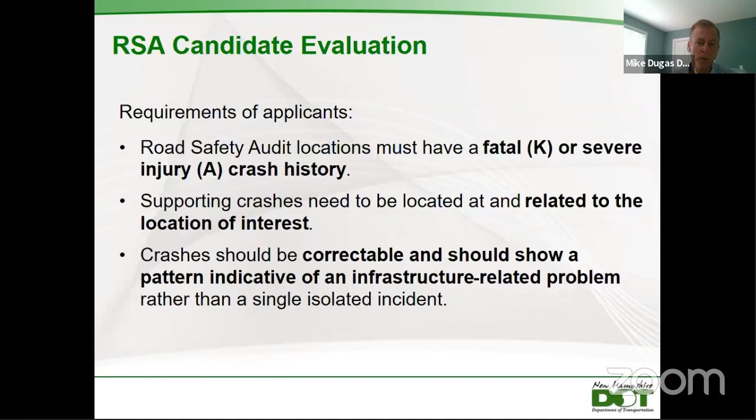With those conditions met, the applicants that meet the basic requirements are evaluated by my HSIP committee. The ones that are accepted—we accept up to three or four per application period, which is about what our resources can handle.

For the successful applicants, I would work with the applying community to put together an audit team. That's comprised of DOT staff, Federal Highway Administration usually participates, and then participants at the desire and direction of the town—customarily administration representation, emergency responders, and perhaps also abutters.

The audit itself typically lasts about half a day. We'll have an introductory meeting in the morning, followed by an on-site field review so participants can have conversations about what they're seeing in the field. Then finally, we return and have a recap meeting so everybody can share their observations and begin discussing what types of infrastructure improvements might help the situations observed.

A really important element of the road safety audit process is that the goal is to reach consensus among the DOT and non-DOT participants on the possible range of short, intermediate, and long-term improvements that would be reasonable to pursue.

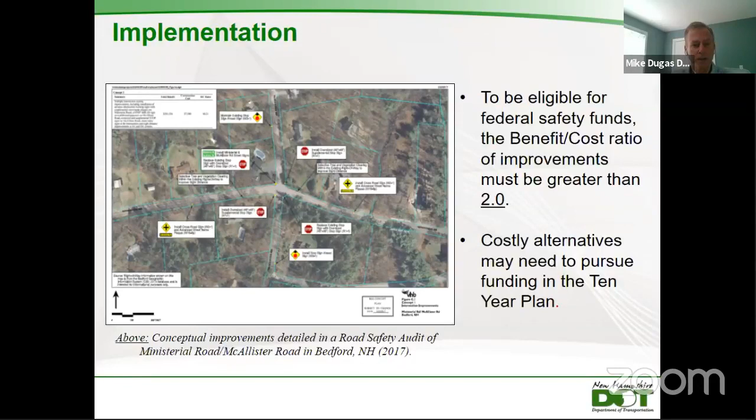If there are no questions on the road safety audit process, I can answer them now, or you can save them for later. If not, I'll proceed into a discussion of the site in Brookline.

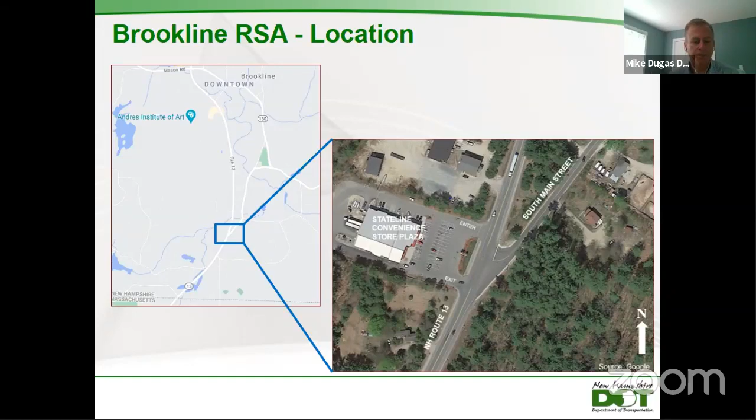To summarize the existing conditions at the site, first, the speed limit through the site is 50 today. The town has been interested in getting that lowered for some time. The DOT did a formal speed study several years ago, and at the conclusion we recommended keeping the speed limit as it was. That was based on consideration of the current traveling speed of traffic, but also the context of the highway being mostly rural with not that many driveways, although there is certainly growing development pressure at the intersection that may lead us to reconsider that.

The second item of information shown is the average daily traffic along Route 13, which is just under 10,000 vehicles per day, and on South Main Street it's about 3,300 vehicles per day. That's an average annual figure, so it fluctuates seasonally, sometimes higher, sometimes lower. South Main Street is a very popular connection linking traffic, probably originating from northern Massachusetts over towards the Nashua region.

Looking at the physical layout of the intersection today, the skew, the sharp angle at which South Main Street intersects Route 13, leads to problems. One of the most obvious is that northbound right turns, because it's such a shallow turn, can be made at a very high rate of speed.

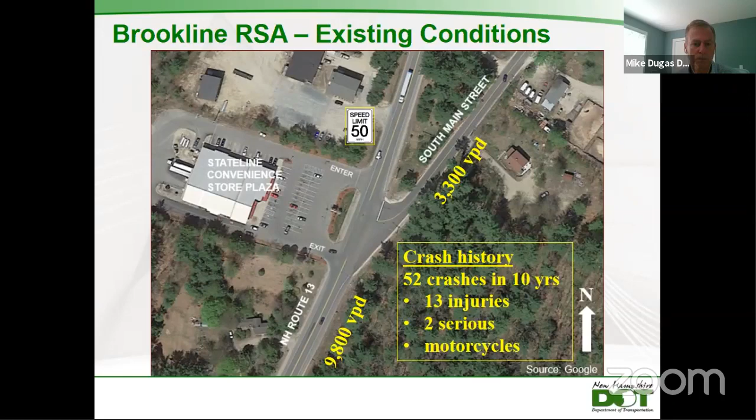The finding of the road safety audit team in our discussions in the field was we identified really three principal safety concerns at this intersection. The first one being the high speeds of through traffic along Route 13, and then the hazard that presents to turning traffic.

A second safety concern was that sharp angle at which South Main Street intersects Route 13, and those fast northbound right turns that are possible.

I should mention also that with the sharp angle of South Main Street coming into Route 13, it also makes the turning movements out of South Main Street somewhat awkward at times. It makes sight lines more difficult than they would be at an intersection aligned at more of a right angle.

And then thirdly, as I already stated, the driveways, the commercial driveways across the road from the intersection do create confusion and hazards of their own with turning traffic in and out of those driveways.

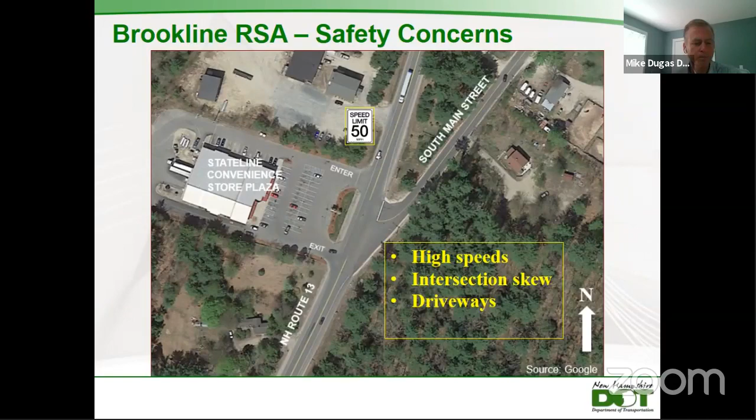So again, the objective of the audit is usually to develop a menu of improvement alternatives, ranging from low-cost fixes that can be implemented quickly, to intermediate term options that might need some modest level of funding and planning, to long-term capital improvements that implement some of the more comprehensive treatments.

So this first concept presents some of the lower cost elements. I should mention that these elements are pretty much independent and could be combined in different combinations. This concept combines several different treatments.

The first is shown in this crosshatching in the southeastern corner of the intersection. It shows the potential removal of some existing pavement, the intention being to make the northbound right turn movement follow a tighter radius, thereby slowing down the speed of that movement.

A second element of this concept is the potential to add a median traffic island on South Main Street, separating exiting from entering traffic. Another possible benefit of having a median island there would be the ability to add a flanking stop sign.

So I have a stop sign on both the right-hand side. My mouse is fighting me.

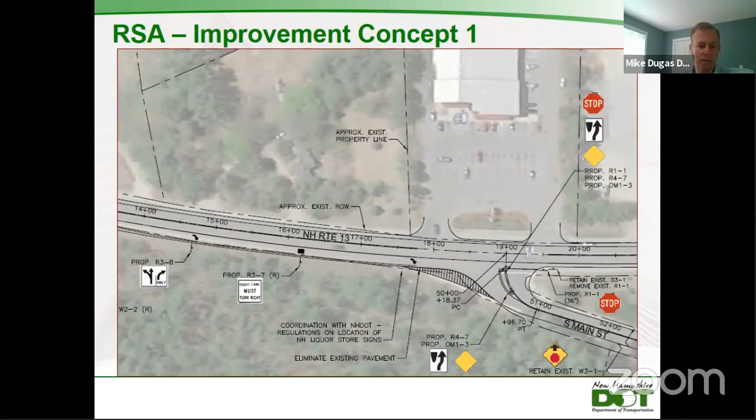As we look at concept two, the main difference with this concept is that it would shift South Main Street so that it's now aligned with the northerly commercial driveway, trying to achieve some reduction in the confusion that the offset nature of those access points causes today.

Again, some of the elements combined in this concept are similar to what was shown in concept one. This would include a realignment of South Main Street, slightly north of where it is today, and reconfiguring somewhat the access to the commercial site.

Today, the northerly driveway is entrance only, and the southerly driveway is exit only. So with this realignment of South Main Street, we would suggest that this northerly driveway could be full access, in and out traffic, and then the southerly access would be exit only to the right.

To the right, simply because it's so close to the intersection that it would operate more safely as a right turn out only. And to enforce that operation, this concept shows narrowing the driveway from its current width, I think 50 feet wide, down to a more appropriate width for that right turn operation.

This concept also carries from concept one the removal of some existing pavement to again try to slow down the speeds of the northbound right turns. It would also add the northbound right turn lane, as well as left turn lanes on Route 13. This concept shows only a northbound left turn lane, but it'd be reasonable to provide a southbound left turn lane too. The southbound left turning volume is likely very low, but it makes sense to have a refuge for those few vehicles making that movement.

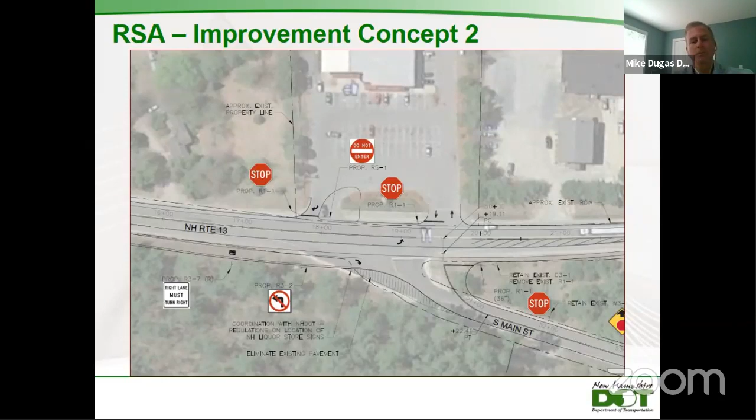Some of the things to keep in mind with this alternative: the size of the roundabout is a reflection of what we customarily arrive at when building a roundabout on a state highway that needs to accommodate all legal vehicles. The diameter of this design is typically in the range of 130 to 135 feet.

And the great benefit of a roundabout in this location, and anywhere really, is that it controls the speeds of all vehicles passing through the intersection. So it truly is a comprehensive safety treatment.

One thing that's not shown but could be in a design here is accommodation of pedestrians. It's very common when there's pedestrian activity and sidewalks in the area to provide crosswalks on the approaches and departures from the roundabout.

So some of the drawbacks, or realities, of a roundabout option: first of all, it's a much higher cost treatment than what was shown in option one and option two. And it would certainly lead to property impacts. I think that would be unavoidable.

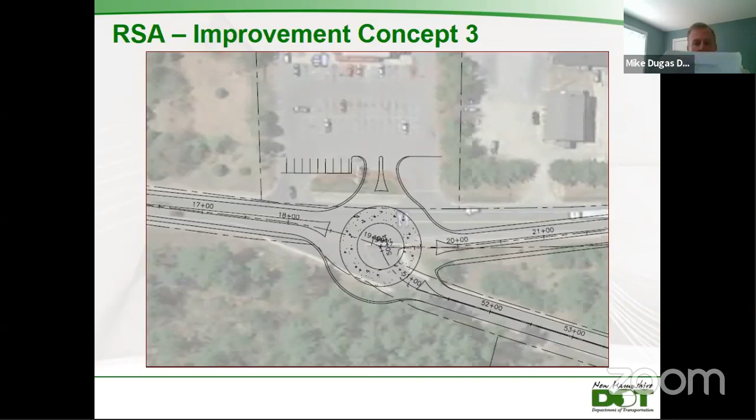And then finally, the next steps that will follow within this road safety audit process: for this specific site, the final review comments from the participating team are being incorporated, and the final report will be issued this month. That report will go out to all the participants in the audit.

The next step after that will be for me and the DOT to screen those alternatives to try to suggest what we think is the most appropriate course of action—which options are the most realistic, which ones would be the most beneficial.

I would then review those alternatives with my Highway Safety Improvement Program Committee within the DOT. To give you a little insight into that committee, it's a dozen individuals, half are DOT from different areas of expertise and disciplines. Then half of the committee membership is regional planners, federal highway, and two representatives from municipal bodies, so cities and towns.

After the HSIP committee, I'll bring those same alternatives to the DOT leadership to get the DOT's agency buy-in on that, and then finally take that to the town for their buy-in as well. Ultimately with this process, we're looking to get consensus among all these different bodies as to the right course of action that will then lead to implementation.

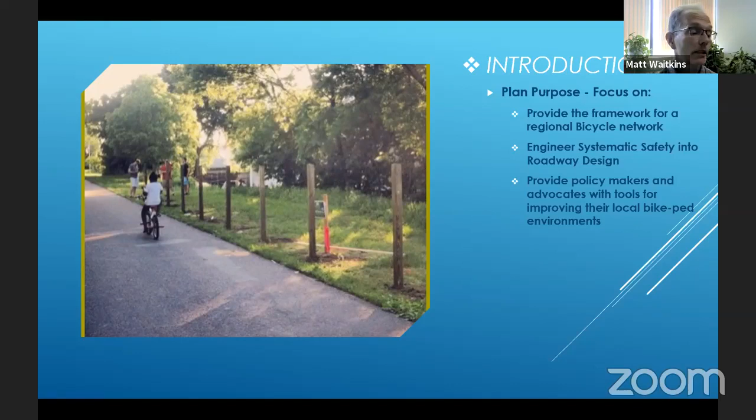The intent of the plan is to provide guidance for planning, development, and implementation of safe and usable facilities. The focus areas are to identify and, in the long term, provide a framework for a bike-ped network, to engineer systematic safety into roadway design, and to provide policymakers and community advocates with the tools for improving the biking and walking environment.

We know there are benefits. The risk of death or serious injury to a pedestrian or cyclist as a result of a collision with a motor vehicle increases rapidly with motor vehicle speed. So if we can improve the biking and walking environment, there are obviously safety benefits to us and our neighbors. There are also economic benefits. We know that more people, regardless of the generation they were born into, are looking to live and work in areas that support biking, walking, outdoor recreation, and commuting by bike or foot. This creates an economic development opportunity for the region.

There are transportation efficiency, health and fitness, and environmental benefits, as well as social equity benefits, because bicycles offer increased mobility to those segments of the population with low rates of car ownership, such as low income earners, unemployed people, seniors, and people under 18 years of age. So all sorts of benefits.

The Federal Highway Administration is invested in bike planning, and they suggest this process for increasing biking and walking should be multidisciplinary, and should focus on equity, diversity, and inclusion. Engineering safety into the road design creates safe places to ride and walk. Education provides the skills and confidence for people to bike and walk. Creating a strong biking and walking culture is a function of encouragement. And through evaluation, we can measure progress on whatever metrics or recommendations we come up with.

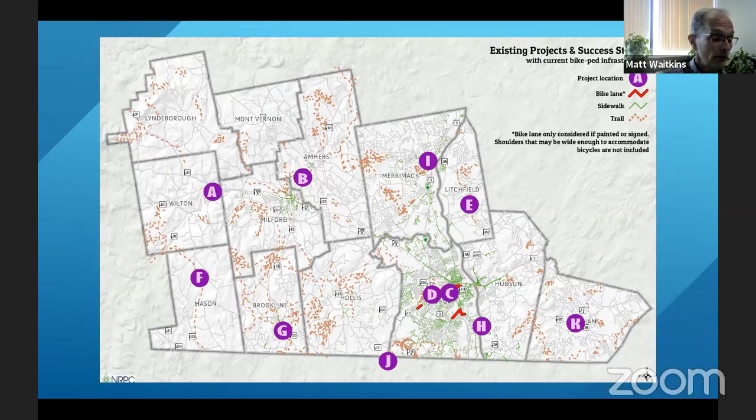So what we also did here is highlight some of these projects. Each of those circles with letters signifies a different project that we thought we'd highlight. They'll be in the plan, but I have a couple of examples here. For example, the Wilton Riverwalk in downtown Wilton. That's a project that began in 2017, and phase 1 opened then—a walkway along the Stony Brook River, near the police station parking lot.

Since then, there's been planning and meetings and so on, and the town has really been moving forward looking for funding to build out this whole river walk. They recently applied for funding for a pedestrian bridge across Stony Brook, and it is ending up in the 10-year plan. So that's a good thing, good effort going on there.

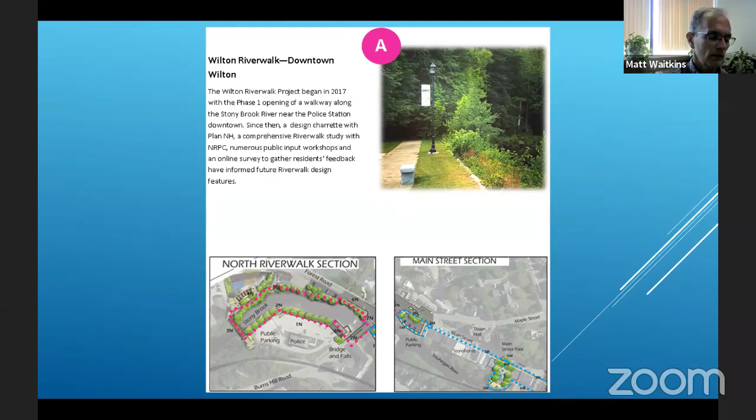I'm kind of cheating on this. This is a project that hasn't actually been built, but as I understand it, they're about to break ground any day now, maybe the end of the month or beginning of the fiscal year. This is the Amherst Street side path. It's going to be an 8-foot wide, multi-use path completely separated from Amherst Street, running along Amherst Street between Amherst Village and the Milford Oval. So that's a concept - again, cheating, since it's not actually built, but it is about to be.

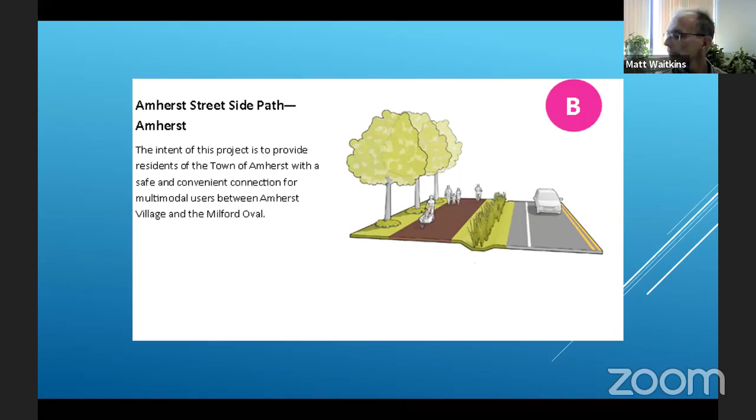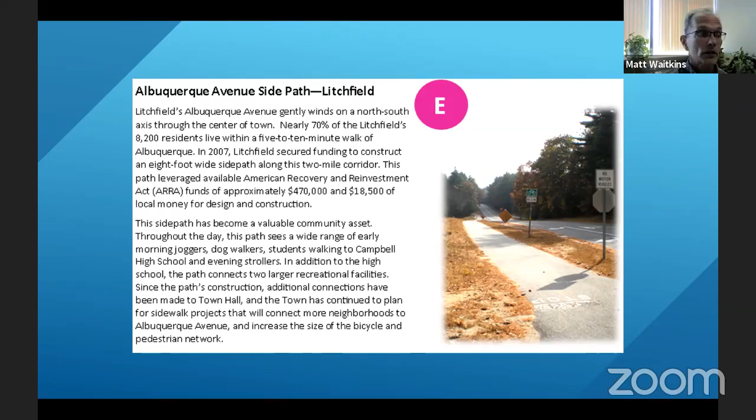This is a real highlight of the region - the Albuquerque Avenue side path. It's oriented north-south through the center of Litchfield. 70% of Litchfield's residents are a 5 to 10 minute walk from this facility. It connects a couple of schools, parks, and so on, and Litchfield is looking to expand its network out from there. So those are just some of the highlights of how we're making progress.

Despite this gradual improvement in bike ped infrastructure, the general perception with a lot of people is that it's not safe to ride a bike on anything but neighborhood streets, the occasional separated use path, or the occasional bike lane. So bicycle level of traffic stress is a planning tool that we're using. It's used in combination with factors such as public input and crash data to identify gaps and needed improvements.

LTS rates a road segment or crossing based on the traffic stress it imposes on cyclists. By looking at roadway attributes such as shoulder width, traffic speeds, and other attributes, this tool identifies the areas where cyclists are likely to feel more or less safe in relation to vehicle traffic. So the goal is to make the network more accessible to more people by lowering this level of traffic stress.

On that legend, you can see there are 4 levels. LTS1 is basically no stress - that's good, suitable for all cyclists, including children. Envision a cul-de-sac or a quiet neighborhood street. LTS2 is more traffic stress, requiring more attention, especially for children. This is for the majority of the population - they're wary, but they're willing. The normal person who would bike if it was safer, that's LTS2, and that's the level we would suggest this regional bike network should strive to meet.

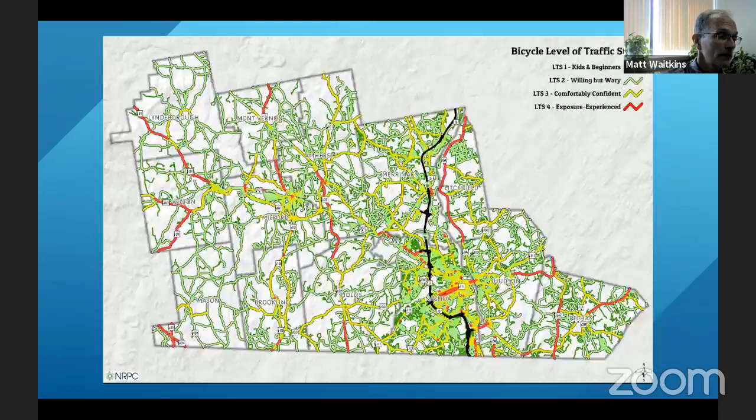One of the ways we can use this - we went ahead and put together a summary of the percentage of road miles for each LTS category for each of our 13 communities.

So again, if we were to get in the weeds here, we probably would be going back and forth on some of these rankings, but that's good. It's a good planning tool.

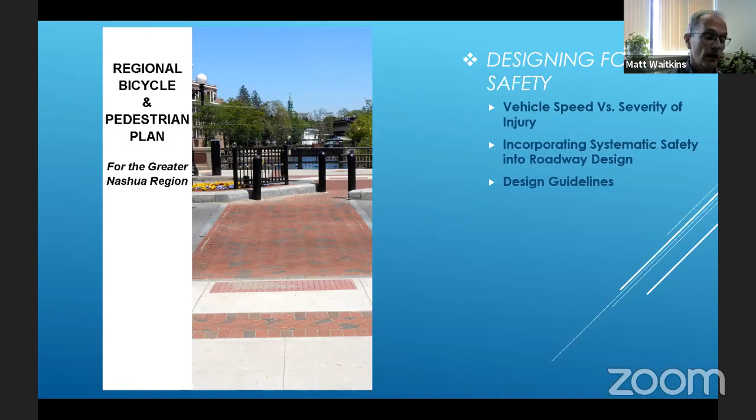So moving on to designing for safety. This is about vehicle speed versus severity of injury. It's about incorporating systematic safety into roadway design, and trying to come up with some useful design guidelines. So the relationship between motor vehicle speed and severity of crashes with vulnerable users is a key thing.

For crashes between motor vehicles and vulnerable users, there's data that shows this pattern: the risk of fatality to that vulnerable user increases slowly at first, and then rapidly once you go above 30 miles per hour. This graphic shows that.

So for a vulnerable user that gets struck by a car going 20 miles per hour, there's a 95% chance that that walker or biker is going to survive. When the speed of that vehicle goes up to 30, there's a 45% chance that pedestrian is going to be fatally injured. Then between 30 and 40, the probability of being fatally injured increases to 85%. That's an important concept to keep in mind, and really important.

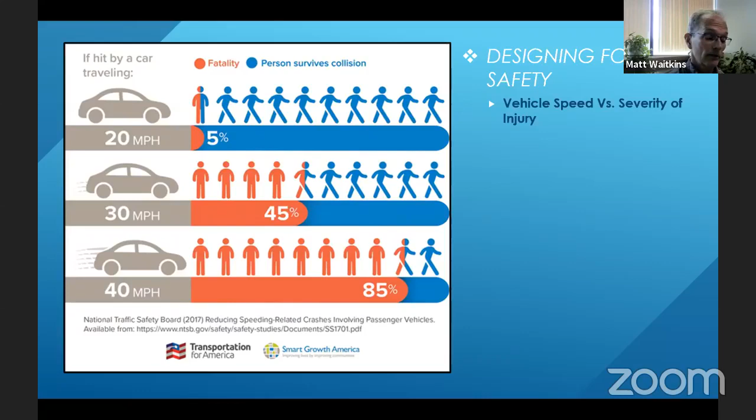This graphic uses information about that relationship and attempts to assign a design category for the different conditions out there. So these low speed, low volume roads, design level 1 roads, in that third column from the left, that's where motor vehicles and multimodal users can safely mix, so long as that design level of the road stays lower in this area - that might be a cul-de-sac, low speed, low volume traffic, really safe. You don't need to do anything. As you start getting up towards 30 miles per hour, you probably need to start being more aware of what could be done from a design perspective.

Those medium speed, higher volume roads, between 30 and 50 miles per hour - that's where vulnerable users and motor vehicles really shouldn't be mixing, except at intersections. And then that higher level, above 50 miles per hour, that's certain death - you don't want to put, in my opinion, a biker on Route 101. You just need to completely separate people out there. So at any rate, each of these roadway categories has unique needs and requires appropriate designs.

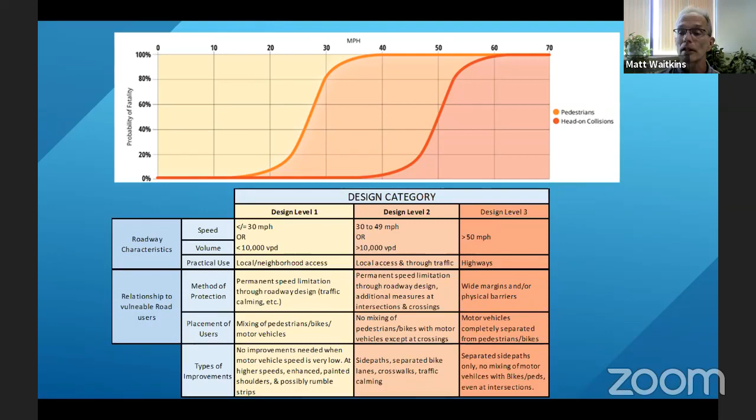Level 2 is 30 to 50 miles per hour with high motor vehicle volume. In this case, no mixing of pedestrians and motor vehicles except at crossings, meaning that where possible, side paths, separated bike lanes, crosswalks, and various traffic calming would be appropriate. Then at design level 3, high speed, high volumes of traffic, basically the only design option is separating people out, rail trails, side paths, things like that.

So what we did, I just have a couple examples of some design treatments we're calling out. For those design level 1 roads, it's unnecessary or impractical to physically segregate motor vehicles from bikes and pedestrians. Often this is your typical cul-de-sac or such, and in those cases nothing needs to be done.

But when motor vehicle speed and volume start increasing and approach the upper level category, something like enhanced shoulders is a design option, and this is actually advocated by Federal Highways in their STAR guide, which is a small town and rural multimodal networks guide.

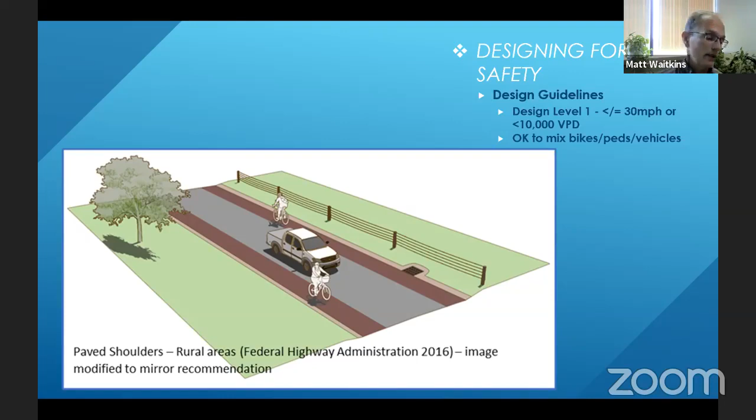For design level 2 roads, those are characterized by speeds between 30 and 50 miles per hour and higher volumes. This category of road, mixing of bikers and motor vehicles should be avoided, except of course at intersections, you're going to need crosswalks, that type of thing. But ideally, if you have enough right of way, the roadway treatment for this type of road would be a side path. There are some cross sections on the left.

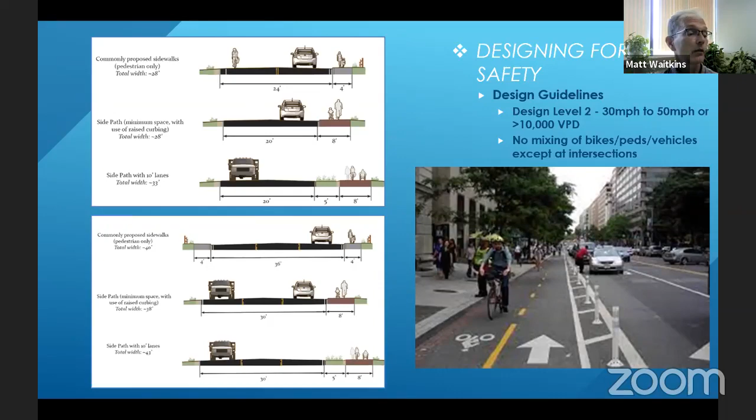Perhaps in an urban area where you don't have that right of way, a cycle track like the one shown here is potentially an option. Then finally, this level 3 high-speed roads, the only option really is to separate people out. Also folded into those design guidelines are complete street policies, which are other ways of calming traffic, which most of us are familiar with.

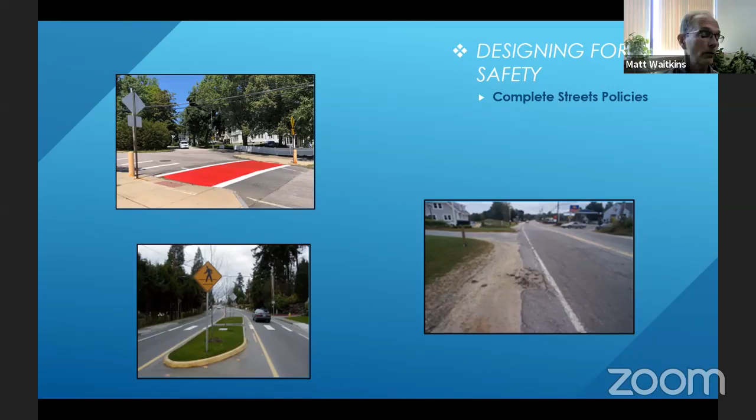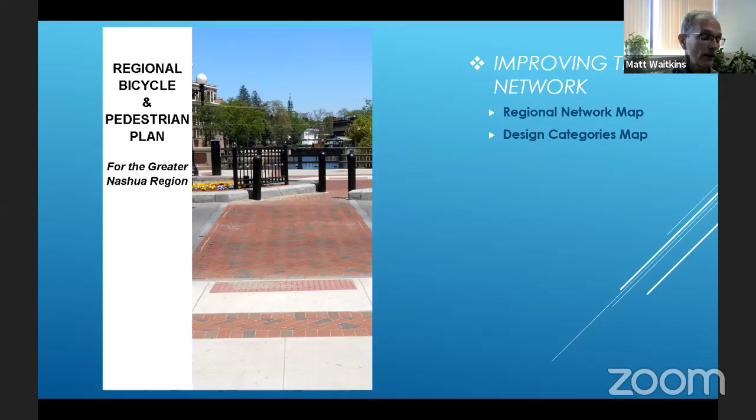There are regional corridors that enable cyclists to travel north-south and east-west through the region, potentially used for longer commute trips between municipalities, or for long recreational rides. Regional connectors function for sub-regional travel, connecting areas of high trip production, like neighborhoods, to desired destinations throughout the region. Local connectors are generally located within municipalities, providing connections between these regional corridors.

So this hierarchy, and this network in general, is a generalized attempt to acknowledge where people are and where they want to go. It's noted that the character of any particular road segment is not defined by whether or not it's part of this regional network. Any segment, regardless of its placement on this proposed network, could potentially be suitable for any bike rider, any level, or it might only be suitable for the most skilled cyclists. So again, it's a generalized attempt at a regional network, and the goal is to encourage as much of this network to be level of traffic stress 2 or better, and try to start connecting it together as we move along.

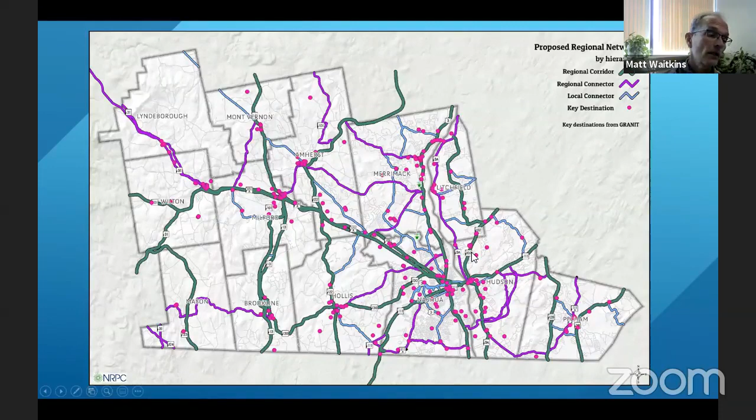This is a map that also attempts to incorporate those design guidelines and the notion of designing for safety into the regional network. So what you see here is the regional network, but for each segment of the network, we categorized it with the appropriate design level as best we could, so it incorporates that network.

These categories assigned to the segments provide a general idea for the types of improvements needed. This is intended to provide guidance regarding improvements that could be made to the regional network based on the design categories of these segments. I don't know if I was really articulate about that, but in any event, what we also did was provide examples of planned and aspirational projects that could create a more usable and connected network. They're highlighted because they serve as examples of the types of projects that could be needed in many communities to address some of these gaps.

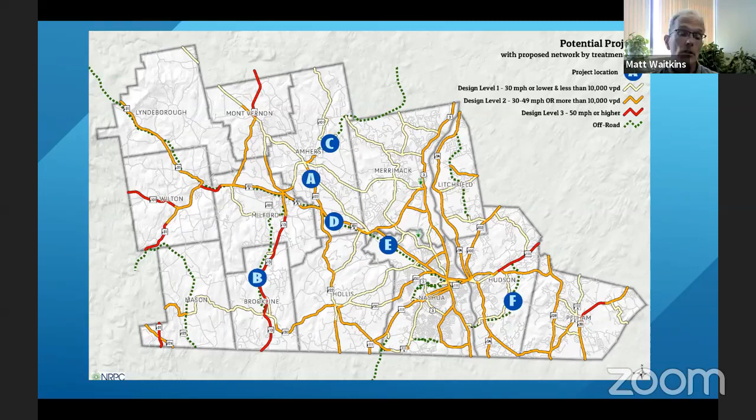So just a couple examples. Route 122: there's a proposal for a project out there. This is basically a 12.6-mile rural highway that passes between Amherst and Hollis. It's like many others in the region, offering a vital corridor between a couple of communities.

This is a design level 2 road, so it's medium speed, high volume, which means we shouldn't be mixing motor vehicles and pedestrians. The proposed improvements include side paths where possible, limiting speeds, reducing potential conflicts at intersections, maybe through roundabouts, defining multimodal space with color on shoulders, and distinguishing the open roadway from public spaces with gateways.

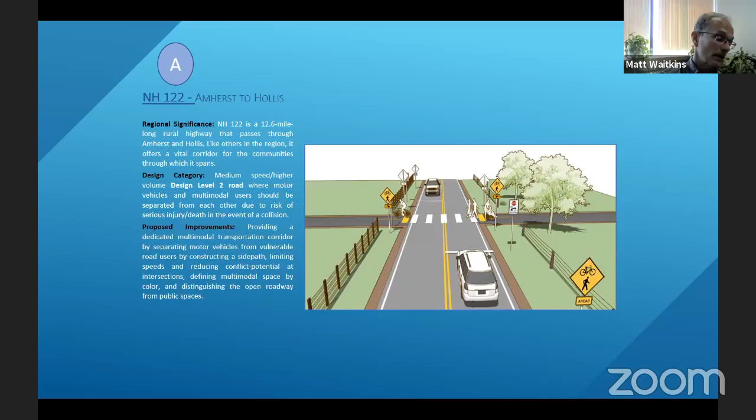Another potential project is the Souhegan Valley Rail Trail. This would provide a non-motorized alternative to Route 101A along the Hillsborough Branch Rail Line from downtown Nashua through Wilton, potentially to Lyndeborough. 101A is again a design level 2 road, and this would be a really good way to avoid that roadway. So the proposed project is just to develop a multi-use trail along that corridor.

So that's really a few of those projects. In the interest of time, I don't think we need to go through any more of them. The next section is about how we use data.

Eventually in this chapter we'll have a discussion about our bike and ped counting, Strava data, level of traffic stress, how we can use census data, and so forth. But for now, I'm just going to note that...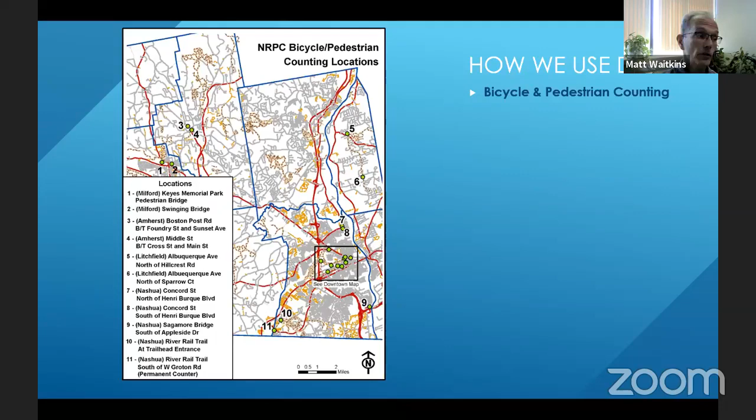So that's all I'm going to say about this chapter on how we use data. You'll see more about that when we have a final draft. I'm also going to skip over recommendations and implementation because we're still working on that. Plan on having that by the end of the month.

Oops. Hello, I think that's all closed out. So any thoughts on that?